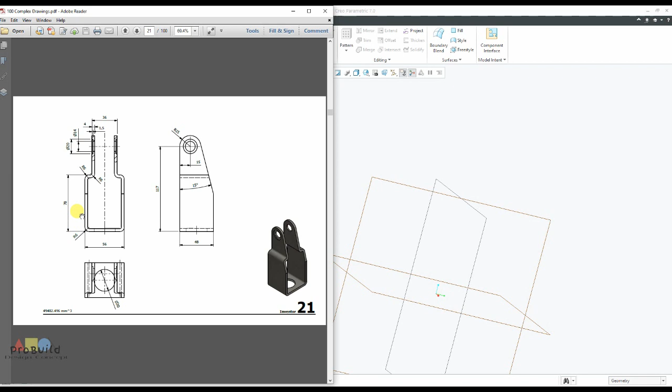So I will start with this part. Here they've given a skeleton that is 56 in length and 78. I'm going to choose this front plane and go for extrude. Switch off the plane, and mark the center line for making it symmetric.

Now I'm going for the drawing. Here you can find a 56 length line, going up to 78, and the inside thickness is actually 1.5, which is given here. I'm going to draw the entire profile and offset it inside.

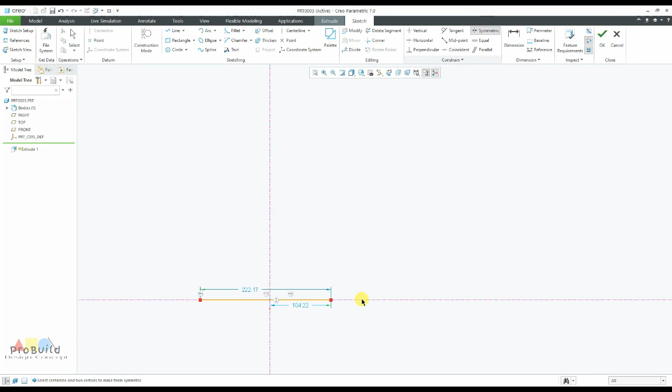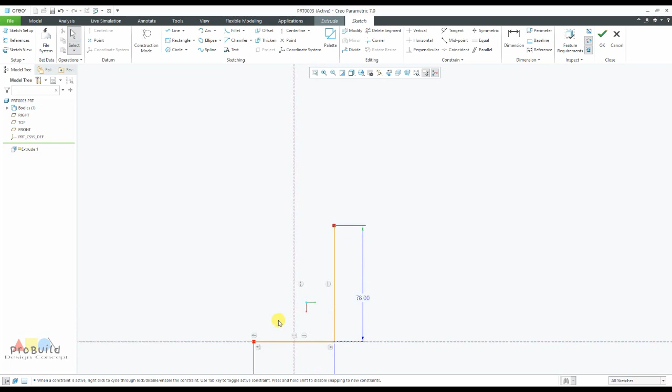So draw a line first, just make it symmetric, and change this to 56. This one I'm going to connect very vertically and change this to 78, and it is going horizontally a small bit. It's going up - here you can find 36, and its height from here to here I need to calculate.

From this center to the bottom surface is actually 117. Since it's having a 15 radius, I'm going to add this 117 plus 15 to get the topmost distance from bottom. So if I add, it's going to be 132, and this length is actually 36.

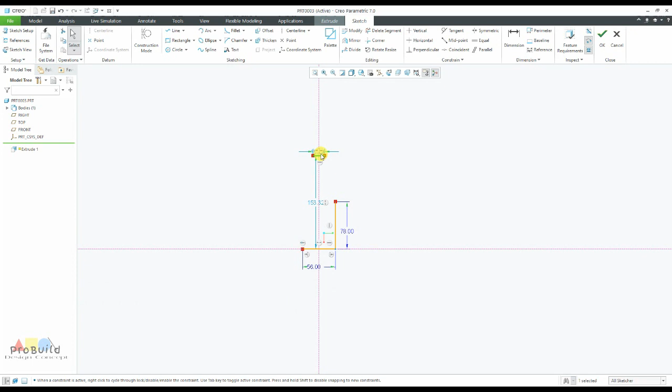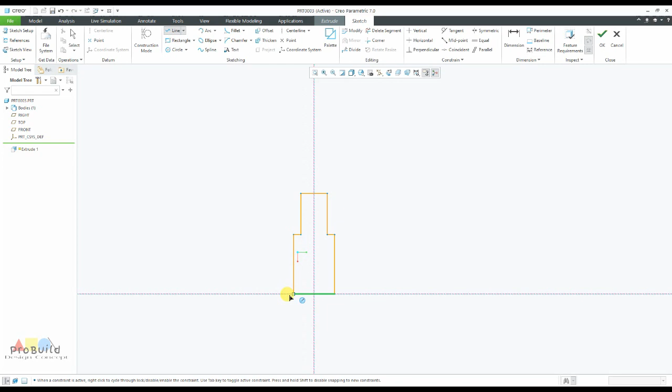So I'm going to draw a line here. It has gone to symmetry. I'm going to draw here 36, and from here this is going to be 132, and all the way down I'm going to connect it this side and even this side. Just follow the signs so that it becomes automatically constrained.

Now it has formed entirely the correct zone. Now I'm going for offset of 1.5 mm. I'm going to offset - just go for loop, select any one side. So it's going inside, so I'm going to give plus 1.5.

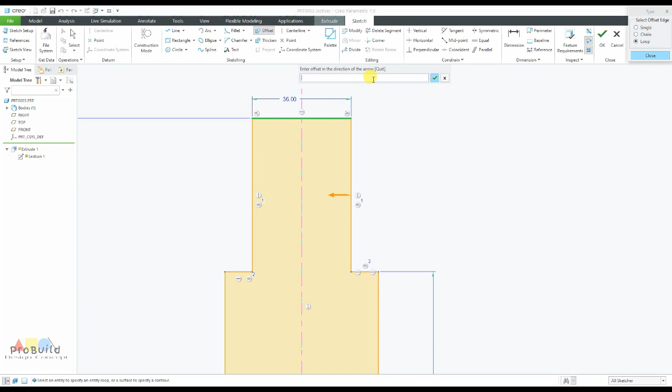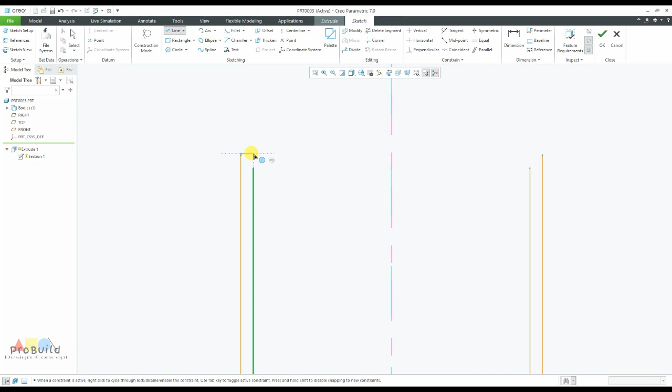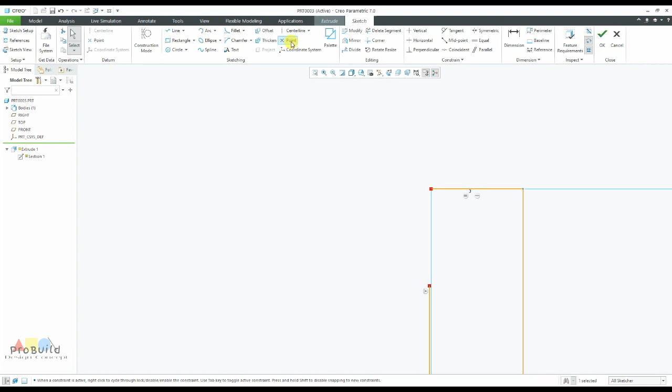Just make sure you connect this point, so just delete this point and corner it. Go for corner - sorry, this hasn't come correctly. Just go for corner, select these both lines to get connected.

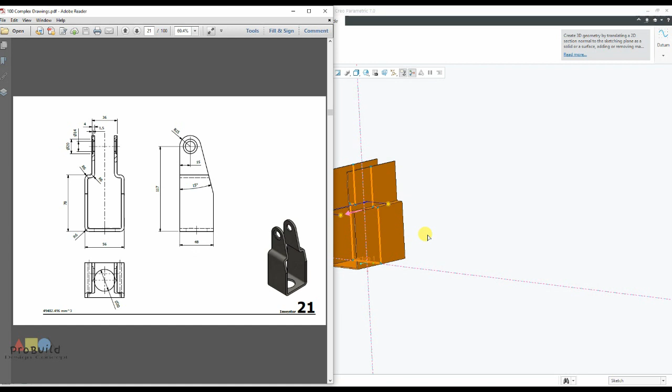Now it is completely constrained, so I'm going for extrusion. Here I'm going for mid extrusion, and you can find here it is 48, but I'm going to do 60 since I'm making hybrid modeling, so I can put up any extrusion level I want. So I'm putting it as 60. This is the part I obtained.

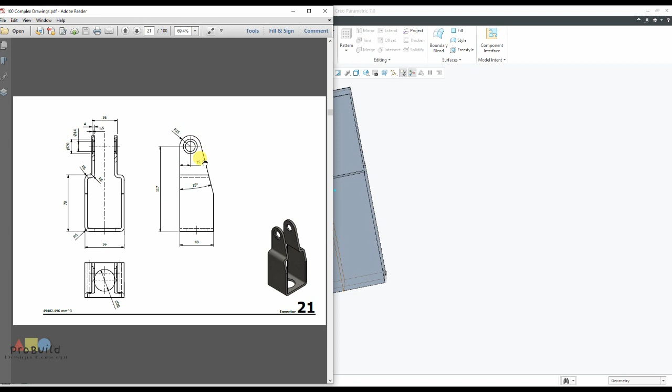Switch on the plane. Here you can find a slope taper is going to take place here, so I'm going to draw that profile here. Choose this top plane and go for extrude once again, just make it into a 2D sketch.

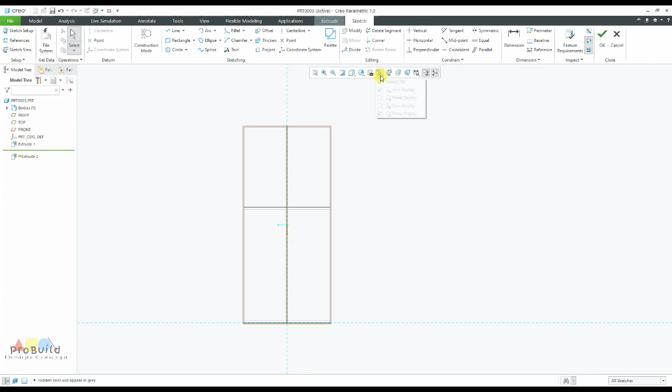Just click this horizontal line, right click, section orientation, set vertical reference. Now switch off this to hidden line and switch off the plane for getting this better view, and take this reference, all possible references. Now I'm going once again here.

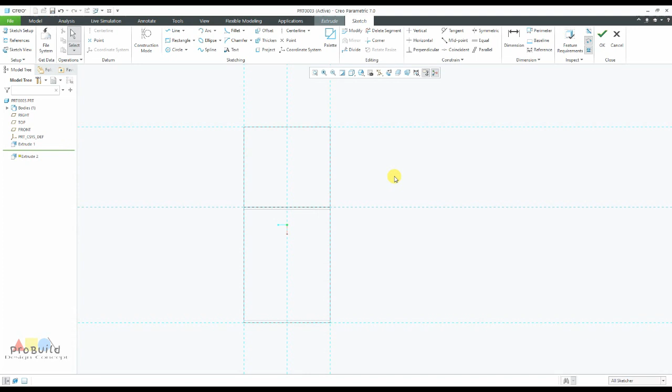Actually I have taken the full clearance as 137, but from here I need to offset a center line to start drawing this circle. So I'm going to draw one center line. From here it is going to be 15, since I'm going to draw a circle.

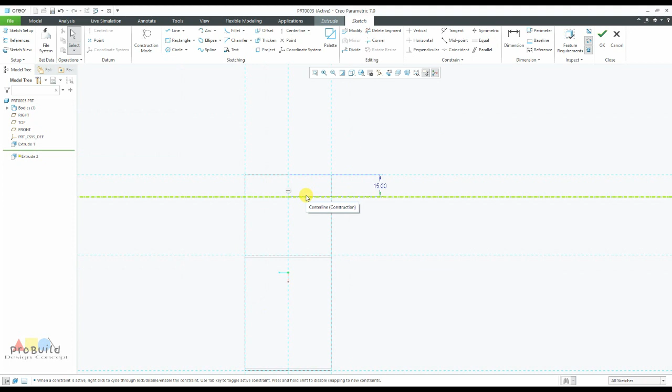So my circle is going to be at this next, stating that it should be very clear, and I'm going to draw one circle just touching this point. So this is actually 15. Now I'm going to connect a line all the way down, and it is going here 48, and it is going upwards, and actually its height is completely missing, so I'm going to assume as 53.

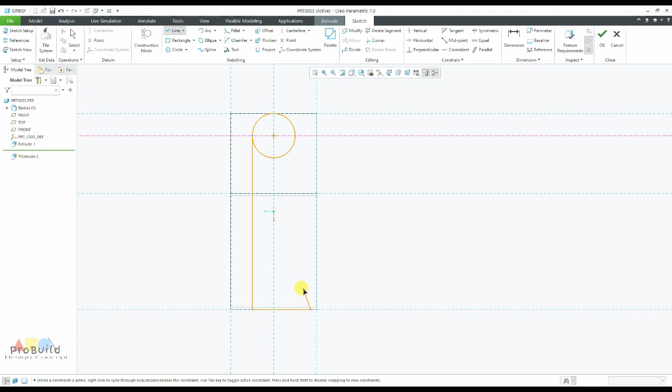So from here I'm going to draw a line. It is actually 48. Oh sorry, it's going outside. So let me change this point, and draw a circle connecting here.

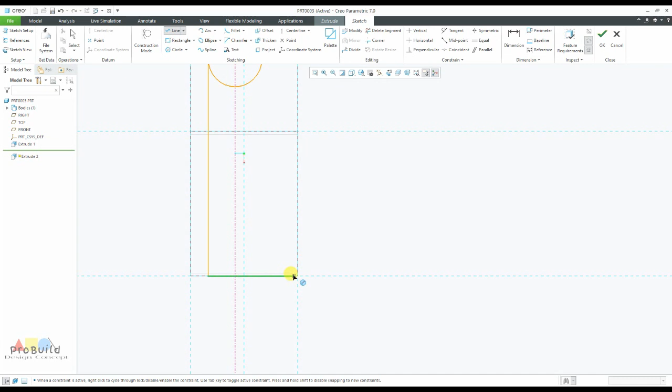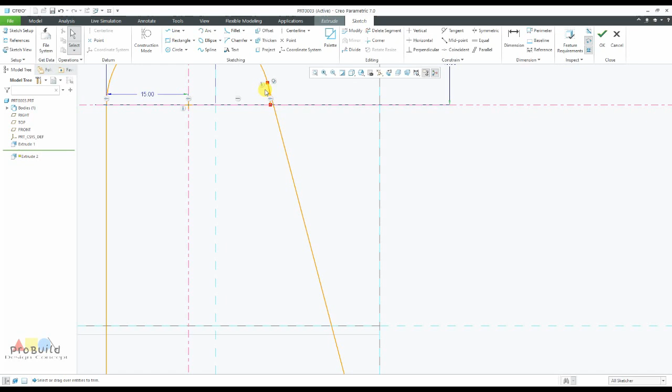Now just come correctly. Now here I'm going to draw one straight line, and going to have one tangent here. You can find this is 53 as set. So let's go for delete segment, delete all unwanted part. So this is the obtained geometry.

So what I'm going to do is sketch. So I'm going to convert this to change to edges. Go for symmetric. Now instead of going into solid, I'm going to choose surface, so that it becomes surface, then click OK.

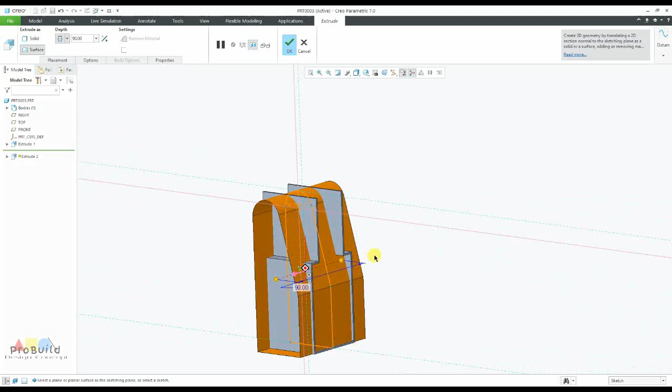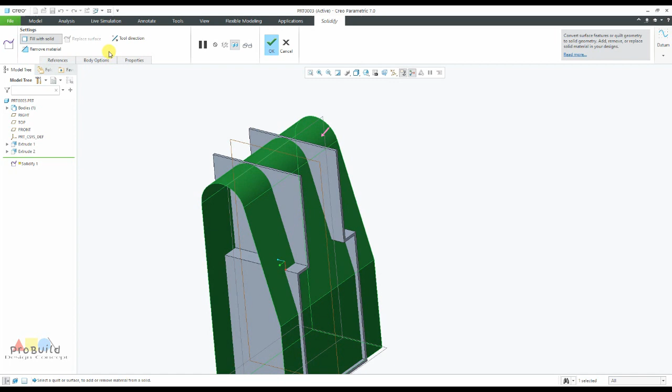So this is the part that I got. Now I'm going to teach you one new command. Select the surface part, and just go for solidify. Here I'm going to remove this material accordingly, for which I'm going to remove material, and then for this flip the tool direction, so that the part what you need will come exactly as in the diagram. So this is the part that we have got, right? So as per this diagram, it has got correctly.

Now I'm going for this C bore hole. You can find the major circle diameter is 20, and this minor is 14, and its height, you can see here, this is 1.5 is its height.

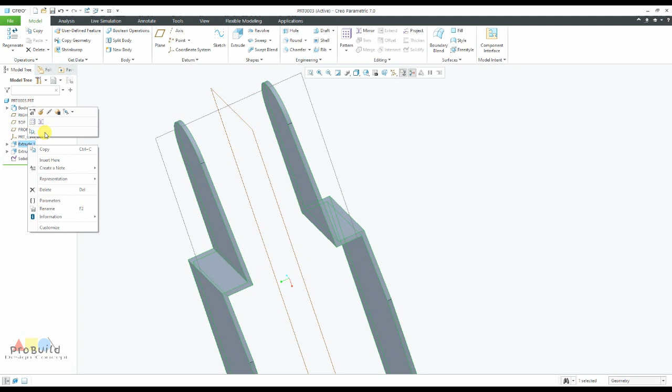So actually I made one small mistake. Instead of making 4, I've made into 1.5. I'm going to change this to 4, so that my entire structure gets changed.

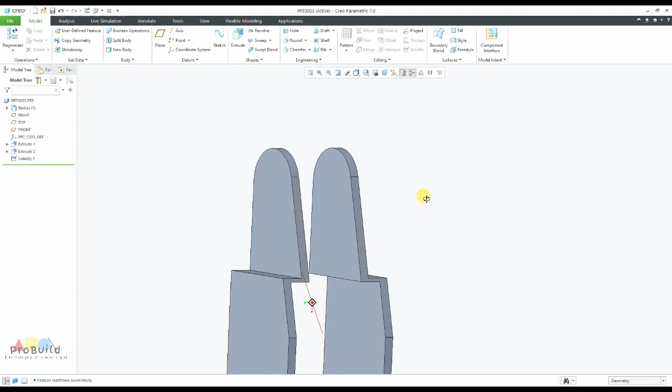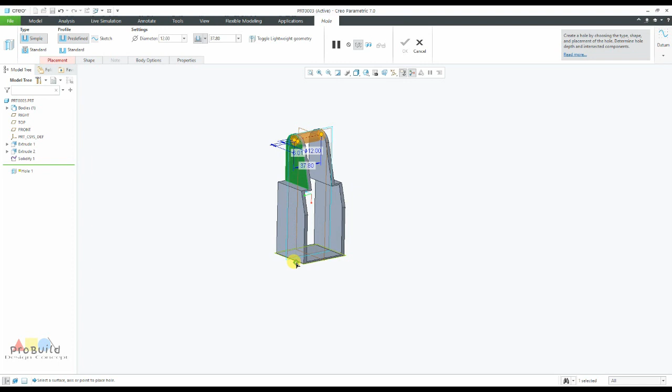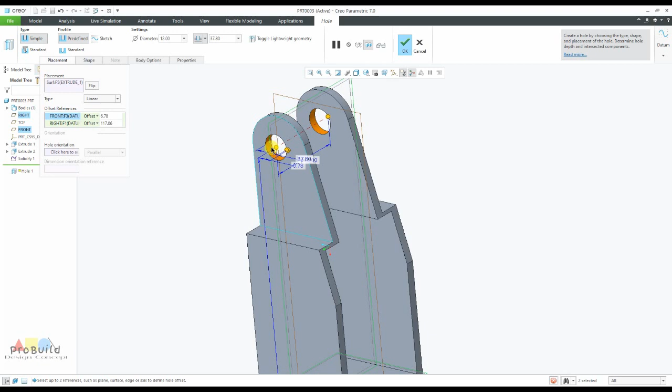Now here I'm going to put up a hole. So select the surface. I'm going to put here one clip, and this to the bottom plane. So from bottom it's going to be 117, and another is going to be aligned 170. Another is going to be aligned. Sorry, this is not aligned. We're going for offset of 5 mm. This is minus 5 mm. This side 5 mm. Yeah.

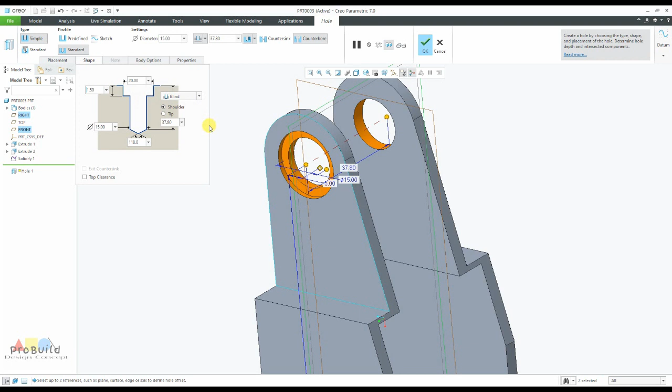And in simple standard, go for this counterbore, and in shape I'm going for 20, and smaller is going to be 14. This is going to be 1.5, and click. Sorry, here I'm going to select up to the surface. This is going to be my surface, and click OK. Now click this hole and go for 3D mirror, select this plane and click OK. That's it, my hole is ready now.

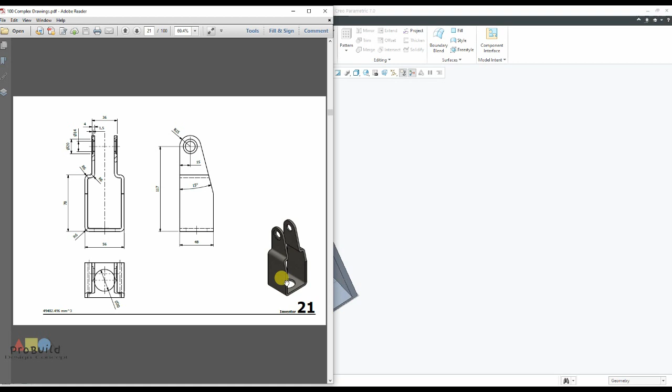And another thing is that you can find one smaller, and another hole here of diameter 30. So I'm going to place it here, another hole, so just place a hole here, just plug it inside, go for placement, get aligned, and its hole is 30. Just click OK. So my part is ready.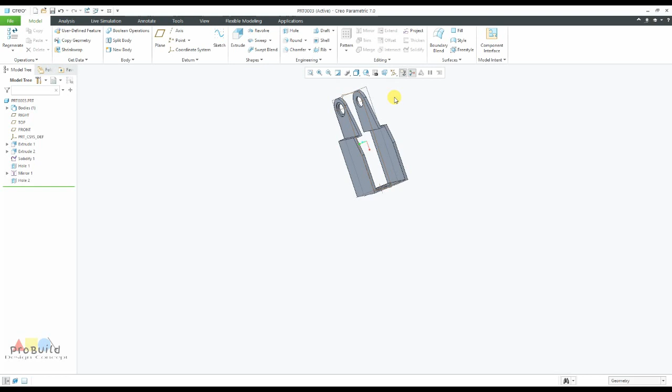Now I'm going for view, change this view to metal, standard metals, change this color. So my part is ready.

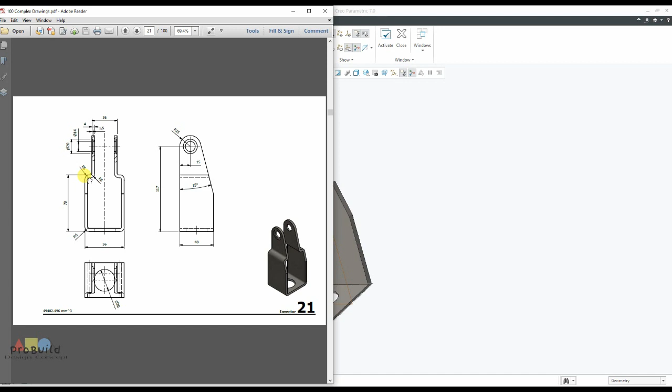Now finally I need to give some round. Here they have given R6, so I'm going to make everything round. So here is R6, and here this point, this point. So this is the part as needed.